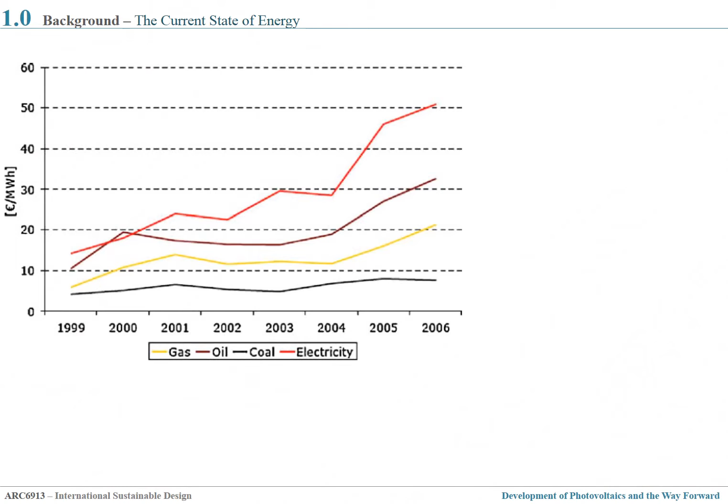A progressive rise of fossil fuel cost is affected mainly by a rapidly growing population, which has resulted and will continually result in a rapid increase in energy demand, thus rendering energy use a crucial concern in the past decades and the decades to come. Environmental issues caused by mismanaged or exploitative energy use have caused the devastating effects of climate change and global warming.

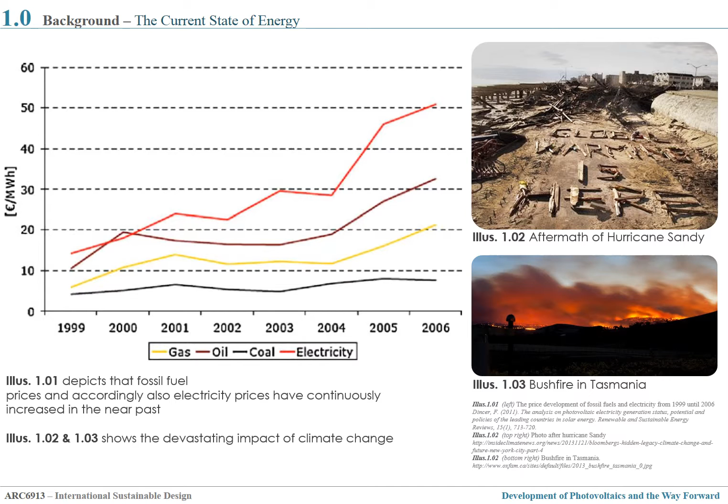According to the statistics released by the World Health Organization, direct and indirect effects of climate change lead to the death of 160,000 people per year, and the rate is estimated to double by the year 2020. This has then led the world to explore other sources of energy so that we can depend less on those which are increasingly deteriorating. Renewable energy is a sustainable and clean source of energy derived from nature.

Renewable energy technology, as described in Furkan's article, is one of the solutions which produces energy by transforming natural phenomena or natural resources into useful energy forms. Currently, conventional energy sources constitute almost 80% of global energy consumption. Renewable energy sources like solar, wind, biomass, hydropower, and tidal energy are promising carbon dioxide-free alternatives.

Despite the general awareness of the advantages of renewable energy utilization, these sources of energy contributed only about 1.5% of world energy demand in 2006. Among various solar energy technologies of sustainable energy sources, photovoltaics appear quite attractive for electricity generation because it is noiseless, it has no carbon dioxide emission during its operation, it has a flexible scale, and is rather simple to operate and almost free of maintenance.

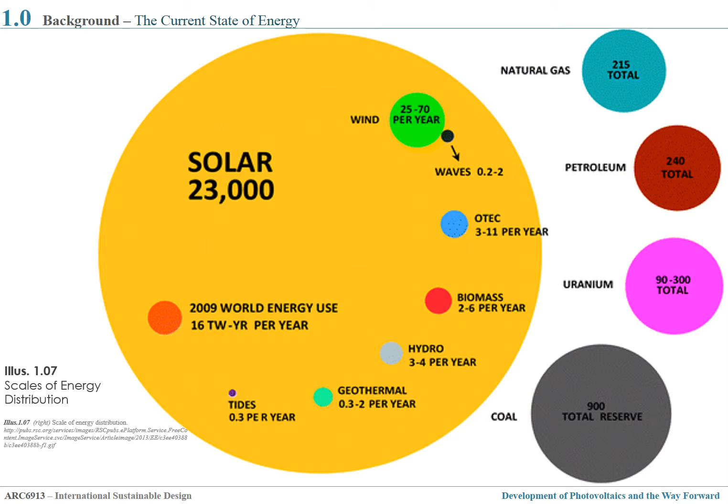This illustration gives us a scale of how much energy is offered by the sun in comparison with other energy sources such as wind, biomass, tides, coal, petroleum, and natural gas. Undoubtedly, there is this much terawatts worth of resource that could potentially be tapped and utilized.

In an article by Mekelev and others, he explains that a solar cell converts energy in the photons of sunlight into electricity by means of the photoelectric phenomenon found in certain types of semiconductor materials such as silicon and selenium. Performance efficiency of solar cells depends on temperature, insolation, spectral characteristics of sunlight, and so on.

Table 2.02 summarizes and gives us a general idea of how much PV technology has improved tremendously over a period of 10 years in terms of efficiency, cost, and system life. High capital investment and low efficiency have limited the applications of PV systems in building industries before. However, PV panels have experienced an 86% reduction in cost while the PV module production rate increased.

The price for solar energy was around $25 per watt in 1970, which dropped to around $3.50 per watt in the year 2010. This has been further reduced today to about $1.475 per watt of rooftop PV system in Germany, which includes costs of BOS, or balance of system, which are the module supports, cabling, and power conditioning, as per the data in illustration 2.03.

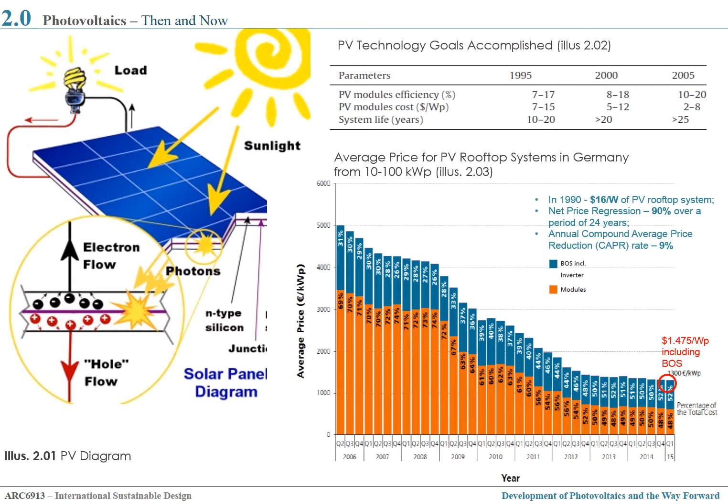In the year 1990 in Germany, the same PV rooftop system cost an equivalent of almost $16 per watt as compared to the current $1.47 per watt. This gives us a net price regression of about 90% over a period of 24 years and is equivalent to an annual compound average price reduction rate of 9%. In an article, Furkan writes that the target is to further reduce the cost to $1 per watt or less in the year 2020.

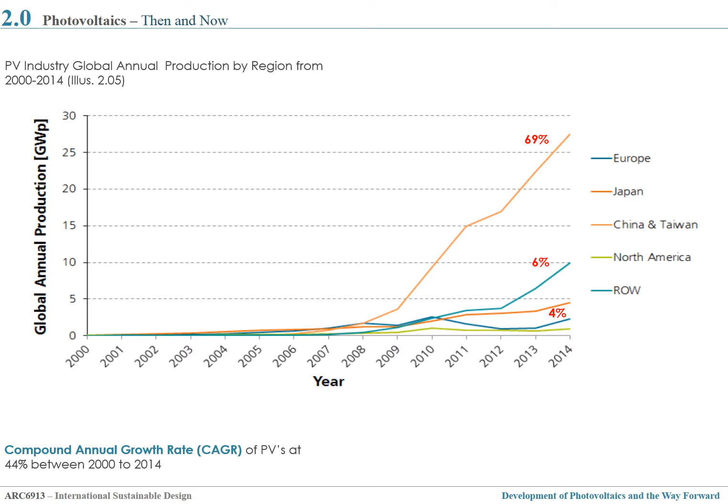The current data shown is extracted from the Photovoltaics Report by Fraunhofer, updated on the 26th of August 2015, whereby photovoltaics can be seen as a fast-growing market with a compound annual growth rate of 44% between 2000 and 2014. PV module production has increased rapidly. In 2014, China-Taiwan held the lead with a share of 69%. Europe contributed a share of 6%, while Japan, USA, and Canada each contributed 4%.

The graph shows the global cumulative PV installation from 2008 to 2014. In 2014, Europe's contribution to the total cumulative PV installations amounted to 48% as compared to 58% in 2013. In contrast, installations in China, Taiwan accounted for 17% as compared to 13% in the year 2013.

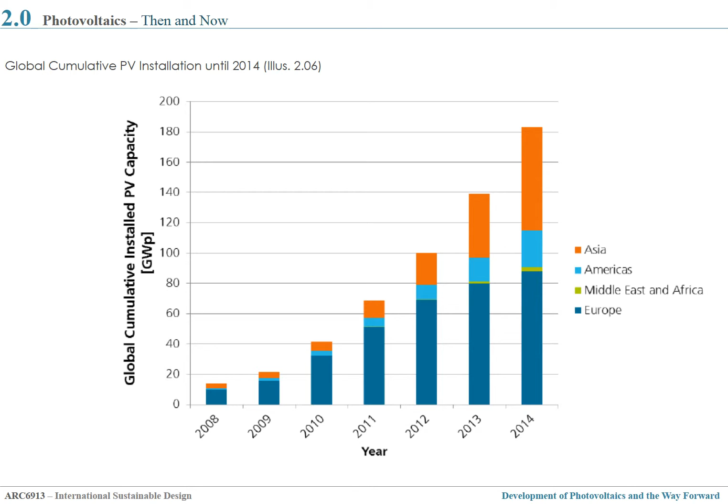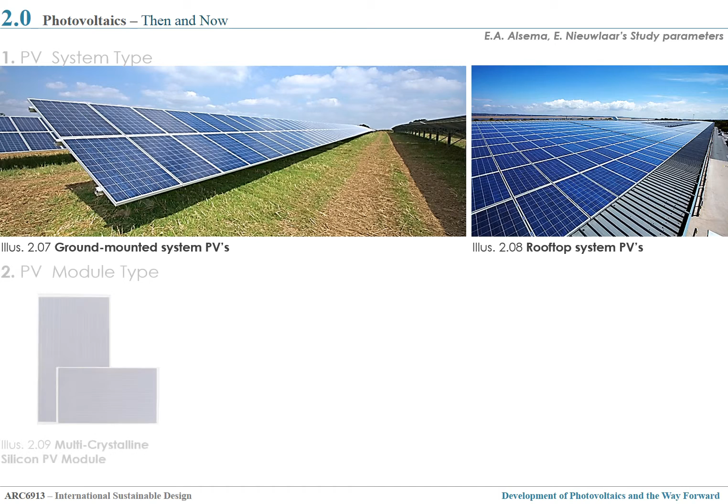In a 2000 article by E.A. Alsema and others, the energy output of a typical PV system and its energy payback time, or EPBT, was studied. Two types of grid-connected PV systems, a rooftop system and a large ground-mounted system, and two module technologies of multicrystalline silicon and thin-film amorphous silicon are considered.

System performance is assumed at a conservative ratio of 0.75, which means that 25% of energy losses occur. A conversion efficiency of conventional electricity supply system of 35% during the year 2000, which is the year of study, was used as a standard.

Finally, three irradiation levels are distinguished, namely, number 1, a high irradiation of 2,200 kilowatt-hour per meter square per year, as found in the south-western USA and Sahara, a medium irradiation of 1,700 kilowatt-hour per meter square per year, as found in large parts of the USA and southern Europe, and thirdly, a low irradiation of 1,100 kilowatt-hour per meter squared per year, as found in Middle Europe, like Germany for instance.

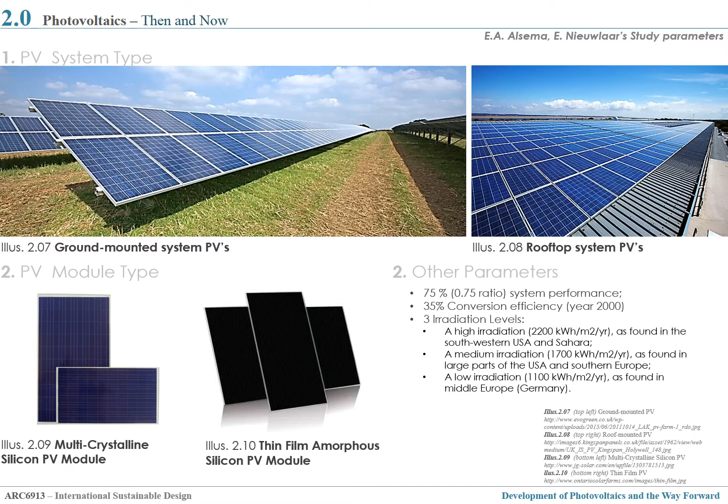Given these assumptions, the study evaluated the energy payback time as the ratio of the total energy input during the system life cycle and the yearly energy generation during the system operation as seen in the illustration. We see in the figure that the EPBT for the study year systems is 2 to 3 years in a sunny climate and increases to 4 to 6 years or more under less favorable conditions.

Also note that the contribution from the supports and the module frames is significant, especially for the ground-mounted systems. Regarding thin film technology, it can be inferred that due to their relatively lower efficiencies, the energetic advantages are partially cancelled by the higher energy requirements for frames and supports.

An EPBT of 2 to 6 years may seem rather long, but in view of the expected lifetime of PV systems of 25 to 30 years, there is still a significant net production of energy. The net energy yield of these systems, assuming a 30-year lifetime, would be 10 to 14 in sunny regions and 5 to 7 under low irradiation levels.

A first conclusion from these energy balance considerations can be that grid-connected PV systems already have a significant potential for reducing fossil energy consumption, although it may take a few years of system operation before these savings can actually be cashed in. This was in the year 2000.

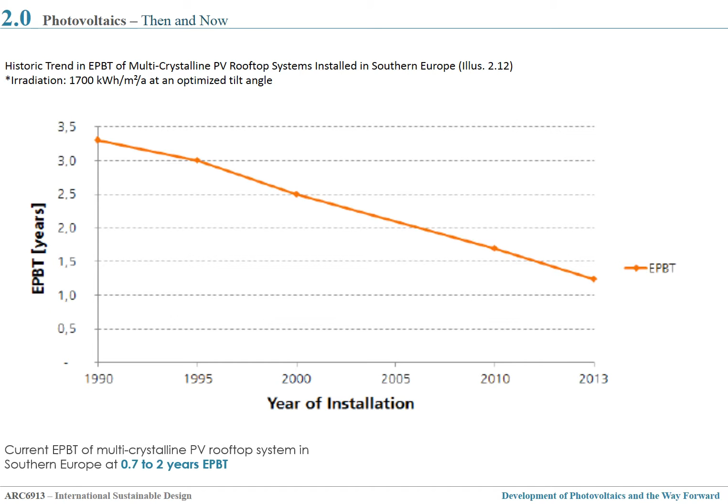Only a couple of decades ago, PVs were dismissed as a non-viable technology because the energy embodied in the manufacture of the cells was greater than the energy supplied by the technology over its lifetime. This has been the state of PVs in 1979. However, the rapid improvements in performance that have been experienced in the last 2 to 3 decades have changed this situation entirely, as the paper by Alsema and Nieuwlaar in 2000 demonstrates.

The results show the estimated carbon dioxide emissions for PV technology are in the range of 50 to 60 grams per kilowatt-hour, which is considerably lower than fossil fuel plants, but higher than two competing renewable energy technologies. With improving technology, PV-related carbon dioxide emissions may become significantly lower, around 20 to 30 grams per kilowatt-hour in the near future, or even 10 to 20 grams per kilowatt-hour on the longer term, so that only in the last case can PV systems be at the same low range of carbon dioxide emissions as the current level of wind, biomass, and nuclear energy.

In another article by V.M. Fthenakis and others in the year 2011, it was explained how material and energy utilization and recycling will continue to improve the environmental profiles of photovoltaics. A recent major improvement is a recycling process for the sawing slurry with the cutting fluid that is used in the wafer cutting. This recycling process recovers 80 to 90% of the silicon carbide and polyethylene glycol, which used to be wasted. Recycling silicon carbide and polyethylene glycol from silicon slurries decreases the EPBTs of these technologies.

The illustration compares photovoltaics greenhouse gas emissions with those of conventional fuel-burning power plants, revealing the considerable environmental advantage of PV technologies. The majority of GHG, greenhouse gas, emissions are from the operation stage for the coal, natural gas, and oil fuel cycles, while the material and device production accounts for nearly all the emissions for the PV cycles. The greenhouse gas emissions from the nuclear fuel cycles are mainly related to the fuel production, like mining, milling, fabrication, conversion, and enrichment of uranium fuel.

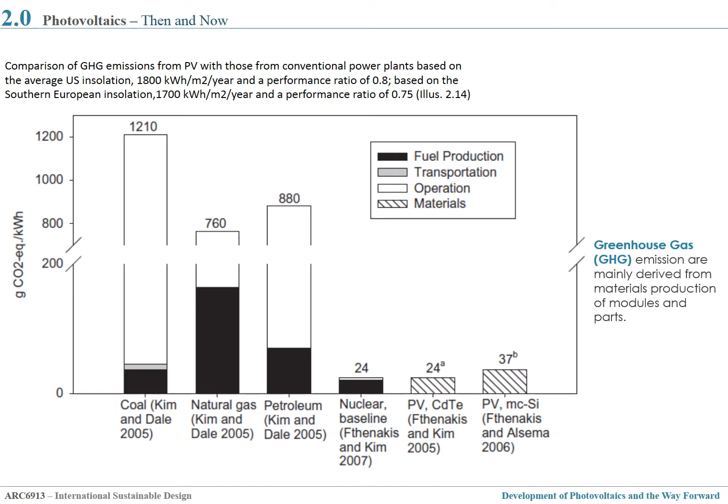Current technology and trends based on today's rates and standards enabled a future forecast of energy payback time and greenhouse gas emissions for different PV types as per the illustration. The decrease is substantial, the forecast helpful in relaying a clear and positive message for PV systems.

The article by Fthenakis and Kim concludes very promisingly for photovoltaics, stating that the PV industry is striving for cost savings and simultaneously for advanced performance, which largely translates into life cycle energy savings and emissions abatement. The conversion efficiency, material usage, and production energy efficiency of both silicon and cadmium telluride PVs are improving rapidly. Thereby, we also expect the risks associated with the life cycles of PV systems to be reduced, and that frequent updates of these analyses are necessary to follow this evolution.

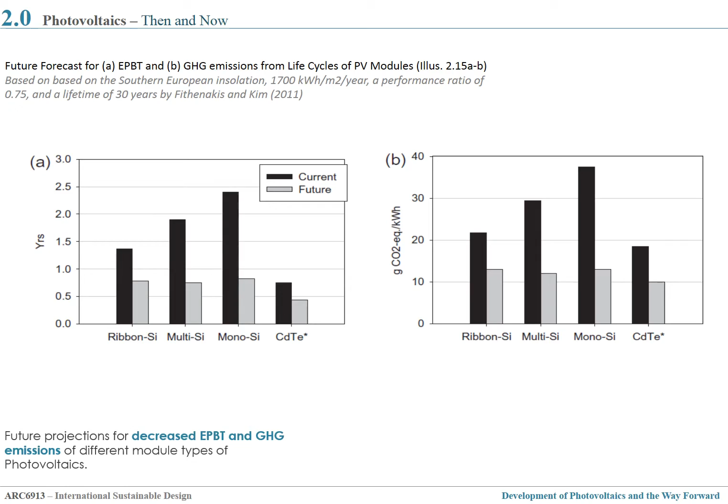Mont Cenis Academy in Germany consists of a huge microclimate glass envelope which forms the shelter for several of its interior buildings constructed in wood. It houses a civic hall, a hotel, a restaurant, a library, and leisure facilities. To prevent the exterior building from overheating in summer, a multifunctional PV system of 1 megawatt peak has been structurally integrated. The PV modules serve as the exterior building skin and allow at the same time shade, daytime lighting, and electricity production. All PV modules were assembled in a nearby plant 15 kilometers from the site.

This project showed that BIPV successfully allows one to control the interior climate of a large microclimatic glasshouse. It is expected that the PV shading system will have a longer lifetime than conventional shading systems. Its multifunctional use makes it attractive and cost-effective. The system, though, is imperfect. The calculated energy output has not yet been reached.

On the roof, although the PV modules are mounted with a slope of only 5 degrees, the sawtooth roof causes some shading on the PV modules in the early morning and evening, as well as in the winter, when the sun is low on the horizon. The effect of this partial shading on the total energy output has been underestimated. But in spite of such failures, the project is yet to be assessed based on a number of quantitative and qualitative, technical and social civic criteria.

BIPV can be of the form of roofing materials, wall and fenestration materials, and flexible photovoltaic modules, and can be integrated to the roof of new buildings or where major roof replacement is undertaken. Methods of integration include exchangeable PV shingles, prefabricated PV roof panels, and insulated PV roof panels. When BIPV displaces conventional building materials, savings in the purchase and installation of conventional materials lower the net cost of the BIPV. BIPV walls, roofs, and awnings provide fully integrated electricity generation while also serving as part of the weather protective building envelope. BIPV can serve as a shading device for a window, a semi-transparent glass facade, a building exterior cladding panel, a skylight, a parapet unit, or roofing system.

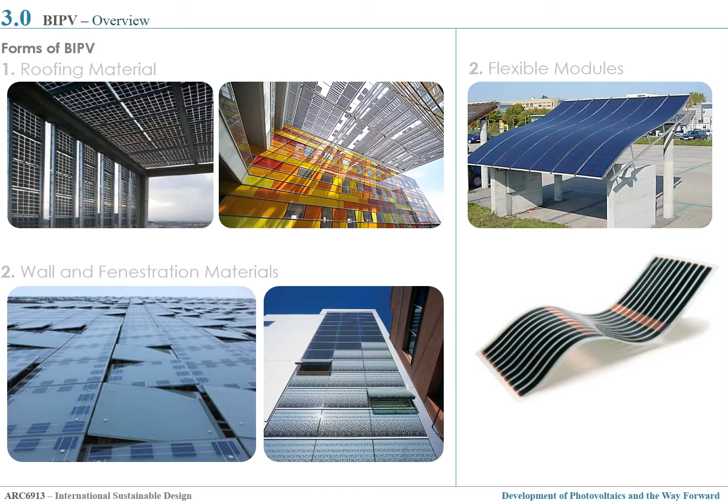Norton B. and others explain in their article, Enhancing the Performance of Building Integrated Photovoltaics, that the adoption of BIPV can vary greatly, within and by country, depending upon climate, built environment, electricity industry structure, government policies, local product offerings, market stimulation mechanisms, consumer demand, existing industrial capabilities, and the forms of tariff arrangement for grid-connected PV power generation. It was also highlighted that modularity of BIPV results in short installation times, and the lack of moving parts reduced the need for maintenance. It was also pointed out that some countries with low specific land use per capita, such as Japan and some countries in Europe, preferred locating photovoltaics on buildings to specifically devoting scarce and precious land.

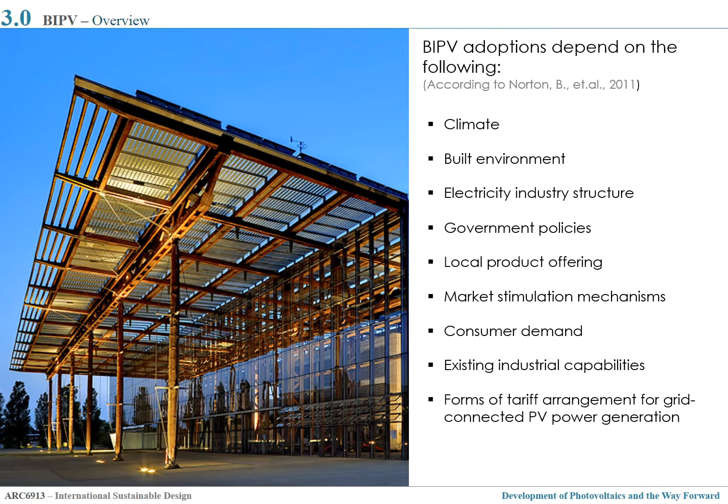Grid-connected BIPV feed electricity directly to an electricity network operating in parallel with a conventional electric source and do not usually require or use batteries. The performance of a grid-connected system depends on PV efficiencies, local climate, orientation and inclination of the PV array, load characteristics, and inverter performance. Oliver and Jackson in their article succinctly enumerate the benefits of grid-connected BIPVs as follows.

First, PV systems integrated into or mounted onto buildings can avoid the cost of land acquisition, fencing, access roads, and major support structures for the modules. This is because the building on which the system is placed either provides or avoids the need for these functions at no additional cost. It would have been there in any case. A building is also likely to be close to the electricity grid, avoiding some cabling costs that would be necessary at a remote PV site. Secondly, PV systems on buildings produce electricity at or near point of use, avoiding transmission and distribution of electricity and the costs and losses associated with this.

This argument is particularly strong for PV systems on commercial buildings where the demand for electricity, say from 9 a.m. to 5 p.m., typically coincides with supply of electricity from PV systems. Thirdly, PV systems that are integrated into the building structure can provide the function of protecting the building from the weather and avoiding the use of other building materials.

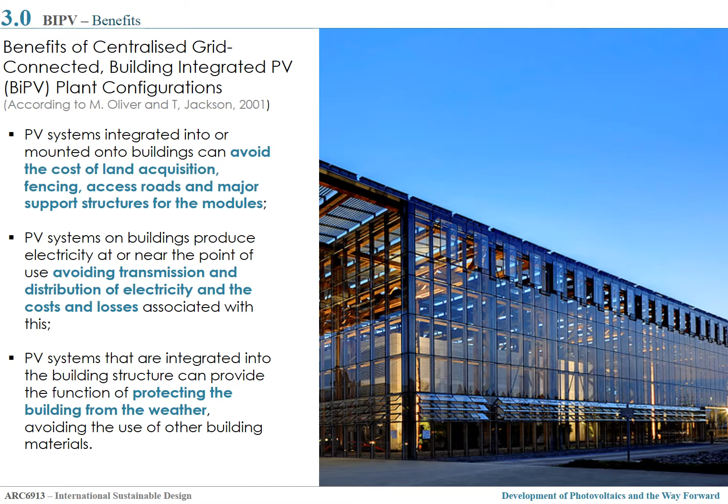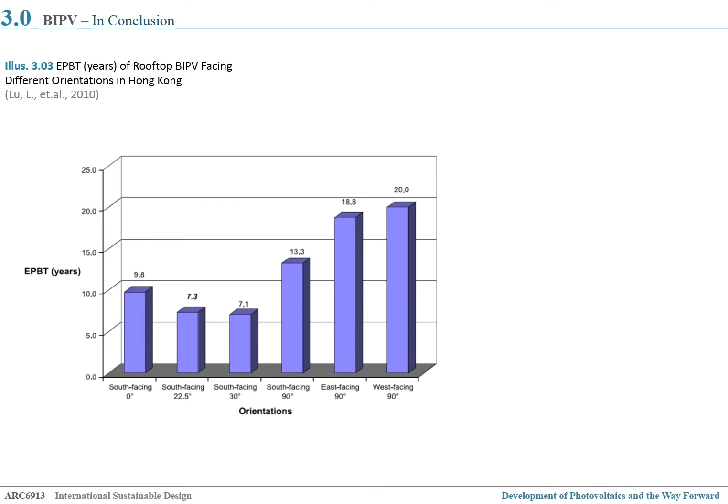Considerable enhancement of BIPV system performance is, however, achievable without improvement in PV cells performance. Given that the latter has and will continue to improve, the prospects for a greater range of viable BIPV applications are promising. Incorporating PV materials into products such as roofing materials, windows, and awnings provides the opportunity for cost reduction by replacing common building materials with PV materials at marginal costs.

Apart from energy benefits, BIPV offers design flexibility and aesthetic balance as compared to the traditional rooftop or ground-mounted PV modules. This clean technology and integrated system offers more aesthetically appealing design options and solutions, which can be easily assumed to be further developed and varied in the coming years. And given the dynamic nature of the PV industry and the expectations for future cost reductions, the economic benefit of BIPV systems will bring forward the date at which grid-connected PV electricity supply in Europe and in the rest of the world is considered viable.